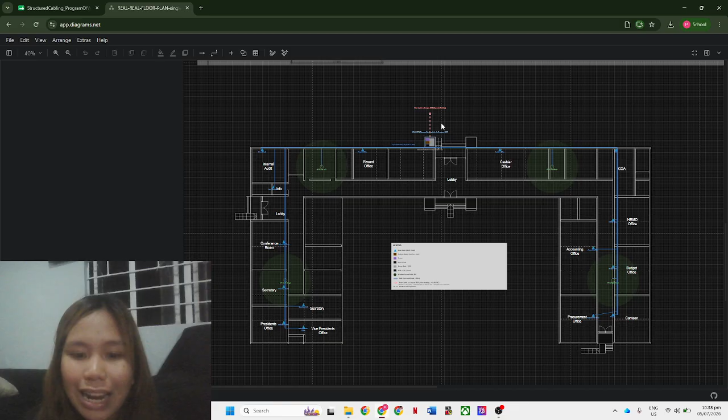So let's start. The actual MDF, as per our knowledge, is located in a building which is in our department or another department, which is in CLIRDEC. So for this building, only an IDF is needed. In this part, it's like a telecom closet where all the cables pass through before uplinking to the MDF.

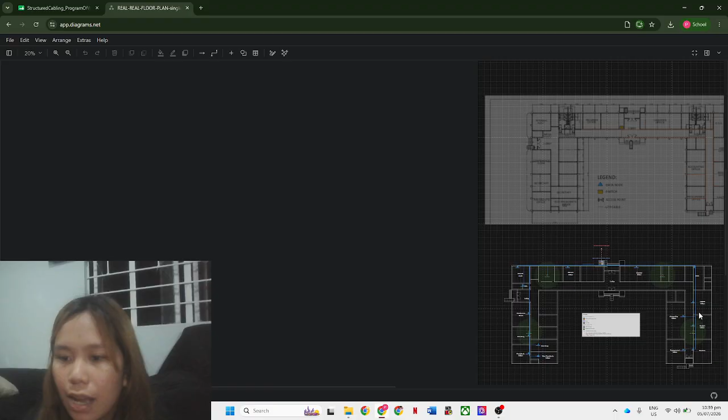At first, I thought of placing an IDF here in the right wing. But then, when I saw the actual cable path, the farthest room, the procurement office, is only 48 meters away. So it's still far from the 90 meter limit of the TIA/EIA-568-C standard, so a second closet isn't needed.

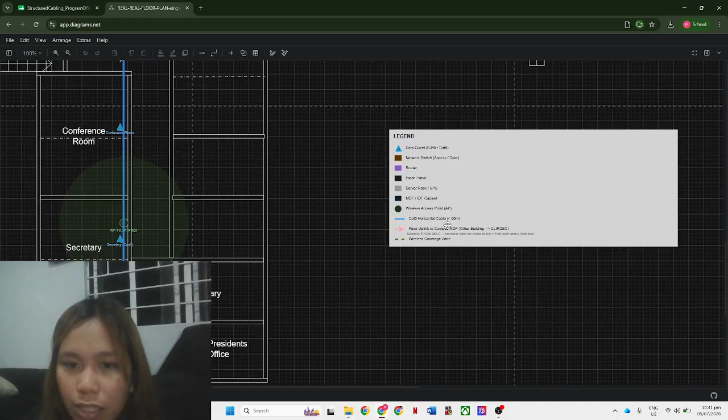So for the legend, here's what I used: triangle for data outlet, for the RJ45 Cat6, network switch, router, patch panel, server rack, MDF, IDF cabinet, wireless access point which is the circle, Cat6 horizontal cable, the fiber uplink to campus MDF or CLIRDEC, and the wireless coverage zone.

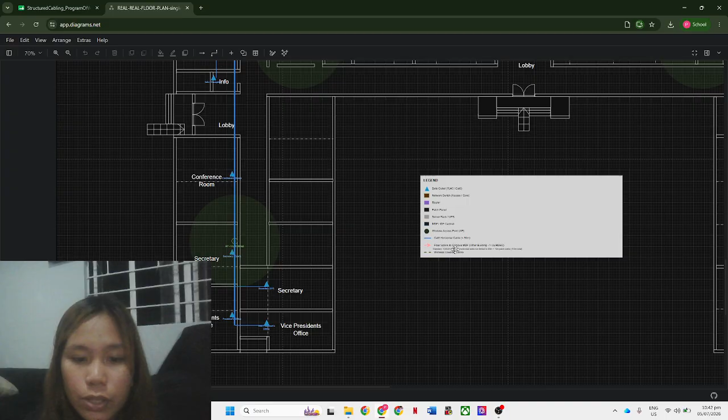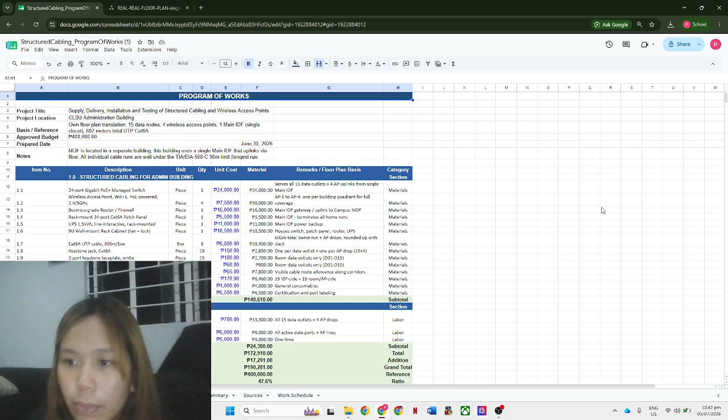So next, I'm going to show the program of works. I want to explain the 47.6% budget utilization. I didn't add unnecessary equipment just to use up the whole 400,000. Instead, I used the remaining budget for the upgrade and quality of things that are actually needed.

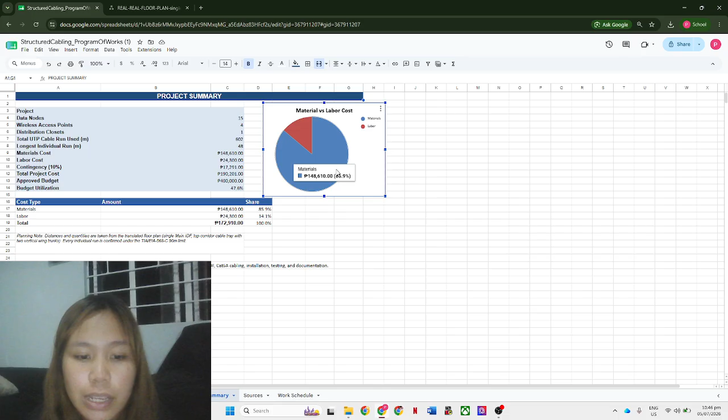So for here, we also have the pie chart. As you can see, we can see how large the share of material cost is compared to labor cost. Next is the work schedule.

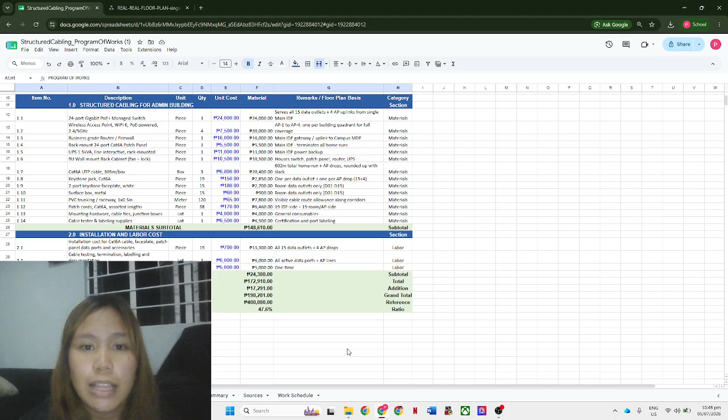And we left a buffer here that can be used for redundancy if this is a priority. For this part, this is the last one, the program of works sources. Again, here is the floor plan that we used.